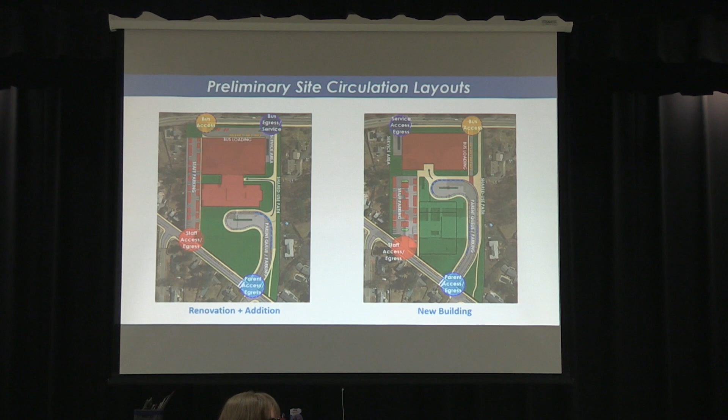Working with you on traffic, but also understanding fields and flow, parking and drop-off, we're establishing criteria and a program for the outside of the building. We have a very specific site here—there's no site like it on Earth. Some people live next door, and you don't live in any other place, as far as I know. So it's really important for us to drive around, walk around, and really understand the site.

The real trick comes in taking that program, understanding there's an existing building here which you've just seen, and then trying to put a new building on the same site so it works better and maximizes the square footage of land available. We've been really focused on trying to help the parking, especially at pickup in the afternoon—people are parking all over the place. We care a lot about the safety of kids crossing walks, and sidewalks blocked off by parked cars. Our traffic engineer had a lot of really good ideas about that, and we're utilizing all of them.

Some of the biggest things we're doing, if you look at the right side, which is kind of a new building, is the idea of getting as many cars off the street for queuing so you don't have backups, and even flexible parking for events, because you can park all around that loop. So we have our parking, but we also have a flexible site. We could come in here and pave the whole site, and you could park everywhere, but that's not good for a little kid to play.

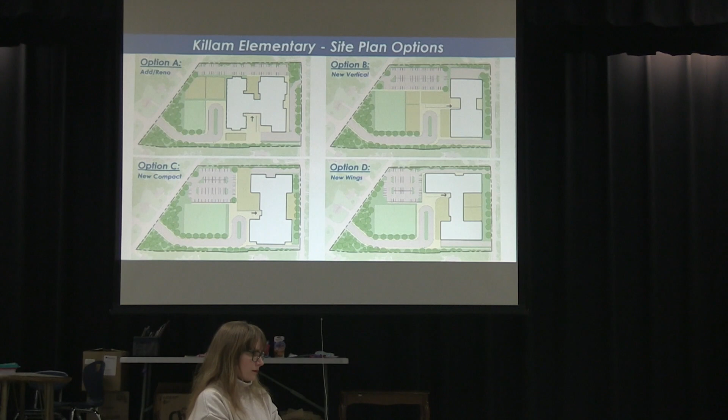It has attributes. And then option D, the idea was, if you could take down pieces of the existing building, say a few classrooms, and there was a way to do that, what would you do differently? Would you re-envision a different kind of layout, a different kind of scheme that might create more opportunity on the site?

So what we're doing tonight is just giving you a glimpse, kind of a heads up. I'm glad there are people here from the select board and people like that, because you're going to see this come back to you over and over and over, more developed. We're just taking the inside and the outside of the building, putting them together. So you've just seen the very first things.

This is the idea of an add-reno. And if you look up here, you see that there's always two. There's one which is A1, full pre-K. That's the larger version. You know that this right here is a one-story, and this is where all the classrooms are. That's the existing wing, but it's one story.

When you have a small site and something is one story, and you have to maybe double the square footage, we can all do the math and realize that there's not going to be much land left. So that's what you see here, a lot of footprint. Even when we build a new building here and it goes 2 or 3 stories high to fit, the length of the queuing is quite short, and we've been trying to get people off the streets. The size of the parking lot along the edge here has a lot of spaces, but actually not as many as we'd like. The play areas are kind of dispersed and limited.

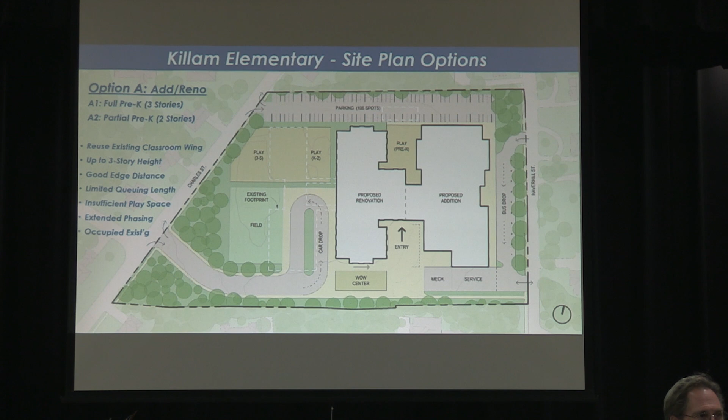For all of these, what we're doing right now is our very preliminary pricing, square footage pricing. We have a really good cost estimator who can look at diagrammatic things and tell us about what it might cost, so that'll be part of your decision-making process. But if anybody asks me tonight how much is it going to cost, I'm going to say I don't know, because I don't—that's the process.

This is so interesting, to challenge yourself to build, say, a 3-story elementary school. I've kind of noticed a thing: when I'm driving around my town and I see the old brick buildings, they're condos now but used to be schools, and they're like 3 stories tall. They used to do it all the time. Then in the 50s and 60s, everything became one story. Maybe they had more land back then, and now there's not as much land.

There is a real trend now to build 2- or 3-story schools again, even elementary schools, for a number of reasons. One, sustainability-wise, it takes up less footprint, and you have more green space, more absorption of water, more natural stuff. It's also better for energy, because a 3-story box versus a spread-out building will have less surface area to lose heat. So it's a good approach, and we should look at it, price it, and understand how it works.

But oftentimes it doesn't work as well for elementary schools when we talk about those adjacencies and the kids going up and down—it's more vertical. It's something for our educators to know about, to tell us if that's the right answer.

And I already mentioned that when we meet again, you will see more 3-dimensional things on the site. We'll even show you preliminary things where you see the height of the building in context with the street. My intuition tells me that a 3-story building too close to the street could be a little overwhelming, and we'd have to either step it or employ other tactics for scale to make it feel welcoming and appropriate.

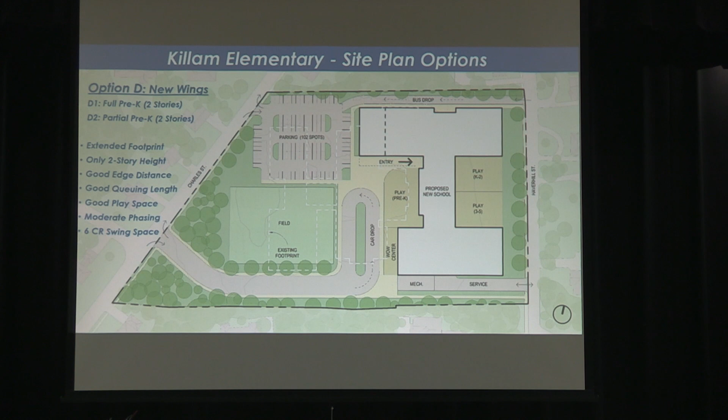Does anybody have any questions? I'm sorry, does anybody else have any questions?

I wonder if you could talk, maybe take one or two options, and talk about how light and sun and heat move. For example, in what you showed, you put the large spaces, the gymnasium, to the more south side of that layout. I see a north arrow. But how does light and heat shape your building design and thinking?

That's from the sustainability guy. So it turns out that 2,000 years ago, they used to build buildings based on the sun. Then somewhere in the last century, everyone forgot about it. Now it's a big deal again, and they're right, buildings should be properly oriented.

I'll start with this one. What we like about this idea is that the wing where all the kids are, imagine all the classrooms, classrooms, classrooms, classrooms, like that, facing south, the sun's coming in like this. The perfect way to do a series of classrooms is to orient them all south and all north. Believe it or not, north light is nice light, it's very consistent. South light you have to kind of control.

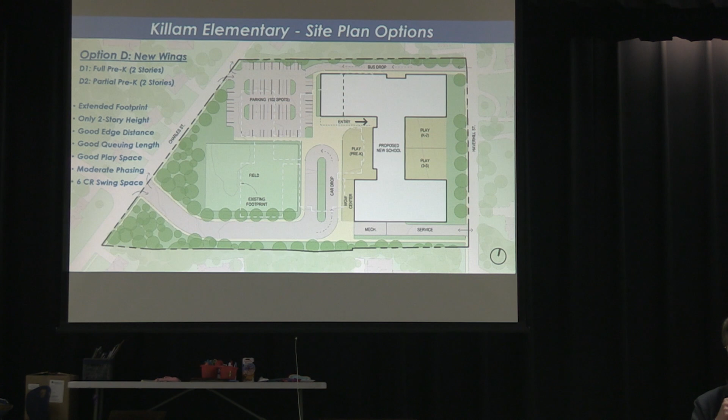And if you can, it's nice to bring light in, to swoop some light down into the middle of a building so it's getting very thick, and share some light evenly. So this building actually orients really, really well. It doesn't have to be on the south side of the site or the north side of it, we could flip this whole thing, but it worked better this way. It's more about privacy also. So these are really well oriented for the sun.

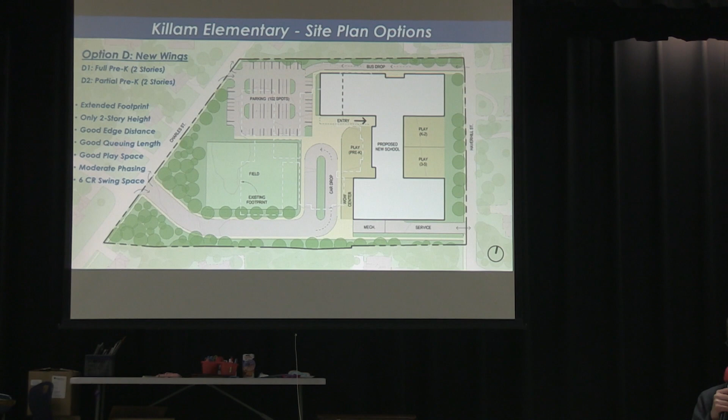In my opinion, west light is the worst kind of light for a classroom. I've learned that from faculty over the years, because in the afternoon it comes strafing in really low. You can't control it. You can pull down the blinds, but it creates glare on the screens, kids can't see anything, and there's heat gain that comes from that. So if you're ever doing a school, try not to put your classrooms on the west side. The east is lighter, it's not as bad.

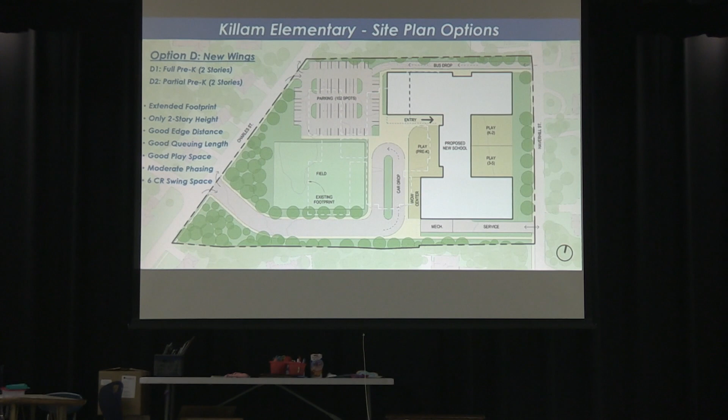These are rules of thumb, and they're really important. For a school like this, because it has different edges, it's not as bad in terms of getting daylight into the middle of the building. You probably don't need a lot of skylights or anything like that. It's really nice.

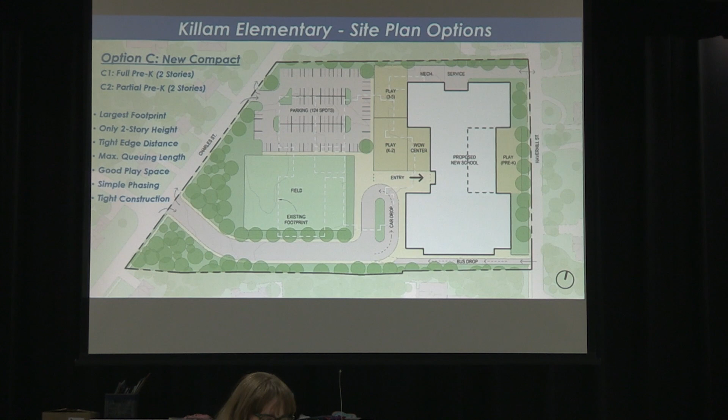If we go back one, you see that this building actually has classrooms wrapping around like this, which isn't bad. I mean, there are some facing west, and I'm not particularly happy about that, but we have to do revisions for it.

These clerestories right here, they blocked this one off because it's probably south-facing. Yeah, that's the south, so they blocked it off, and it still has light coming through. They evened it out, is what they did. This is pretty well daylit during the day when you come in here. There's a lot of natural light. It doesn't feel good not to be able to see outside, but it is well daylit.

So you can see that when you compact it like that, you have to think of it more as a donut, and that's exactly how we would approach it. Daylighting is super important. Why is that important also for heat and electricity? If we can daylight a space, or take a gymnasium and have clerestories around it, during the day you don't have to turn on the lights. You save a whole bunch of electricity, more than you'd think. So daylighting is really important.

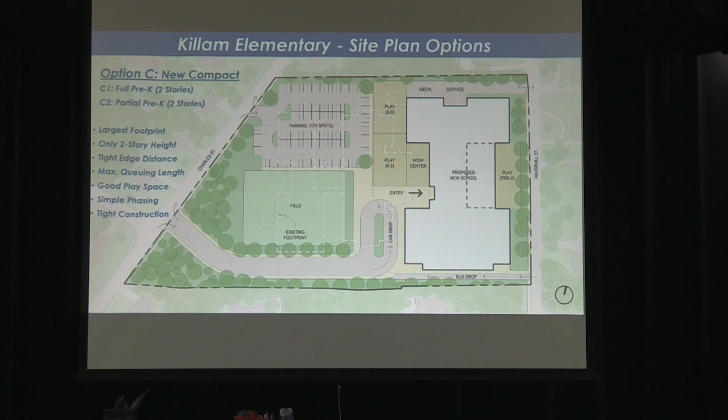And the quality of daylighting is important too, so you can spread the light in the classroom toward the back. Is that the kind of thing you're asking? Yeah, absolutely. Let's hear from our lighting expert next.

I wanted to add to your point about daylighting being important for classrooms. From a climate standpoint, it's important to shield and push the daylight further in. But from a learning environment standpoint, the presence of daylighting for students is so important because studies have shown that the right kind of daylighting and lighting inside learning spaces helps with alertness of children and helps the learning environment. So imagine the opposite end of the spectrum: if it's dingy, you're not excited. But if it's nicely balanced, well lit, without glare and direct sun, that really stimulates students. So I agree with you, I think the alertness side would be tremendous.

That's been your experience too? Yes, absolutely, working on schools as well. Are you a plant? No. I'm a supporter for good environments. I love them.

Anybody have a question? Yes. You're talking about switching the field and parking. My only concern with that would be the people taking deliveries coming in with a big parking lot where the field is. I like where the field is because it separates that rotunda drop-off. You're going to have parking there already, right, so that's just putting that out there.

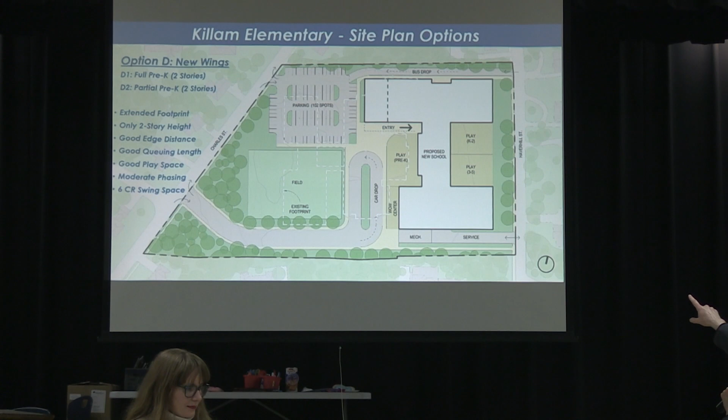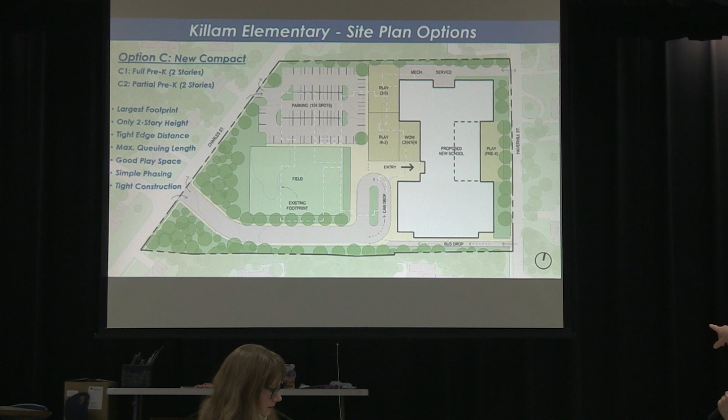But in terms of that, it's very interesting because sometimes you find something you wouldn't expect. This building right here is 2-story, but it's lengthwise and a little closer to the edge. So if we do a study, we might find that even though it's 2 stories, that's one thing. But if you go back, you see that's a 3-story building, but it's much further away from the property line. So you might find interesting things with that, because I can't imagine, you know what I mean. So that's a good one. We will do that.

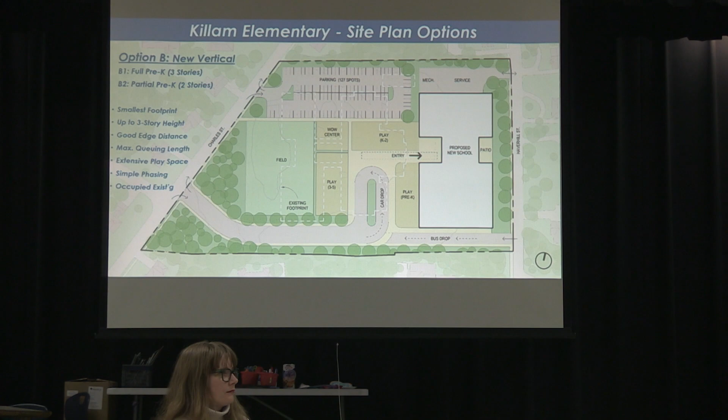We didn't have much more. I hope we didn't disappoint you.

She's not done, I just have a final slide here to talk about our next steps, which I actually started with, so maybe I've already said all these things.

So we're going to be doing preliminary square foot cost estimates starting next week. We're going to continue to develop these schemes, site plans, and building designs. Next time we come see you, we're going to have some of those 3D views we talked about, so we'll show how the building looks in massing, in 3D, and how it looks from the street.

I know everyone's very eager to learn about that. So that'll be July 8th, and we hope you'll make it. We'll all hang around for a few minutes, so if you have questions, or just want to shake our hand, it's welcome. Thank you, have a good night.

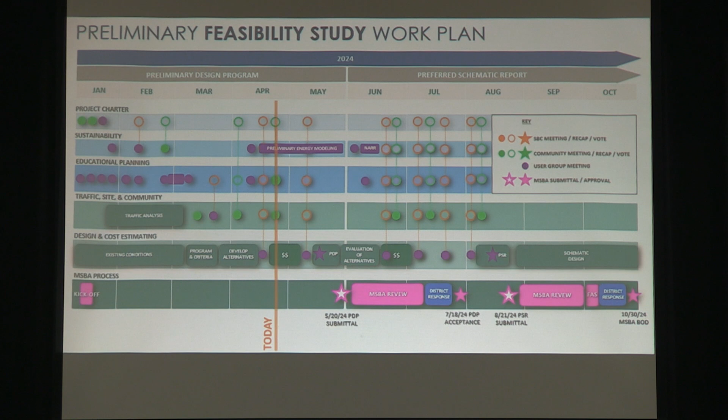So tonight we're going to talk about the educational visioning process we went through with our consultant, MLP, which is My Learning Place, Integrated Design. Then we'll talk about how that educational visioning process has informed the design of the school, the organizational design, how the building is laid out, and the adjacencies of different spaces. And then we're going to show you the 4 schemes, in terms of site planning, that we'll be including for the PDP and in the process, basically where we're at right now with the design at this early stage.

So the educational visioning process probably took 2 months and involved a ton of different people, from staff and the principal at the Killam, the superintendent, and other people from the district level.

We brought in the school resource officer, the rec department, students, teachers, and parents. So all these different people we wanted to hear from, to really understand the Killam school community, the priorities of the community, and the teaching and learning that's happening, the educational process, and then how we can design a school that best meets all of those needs.

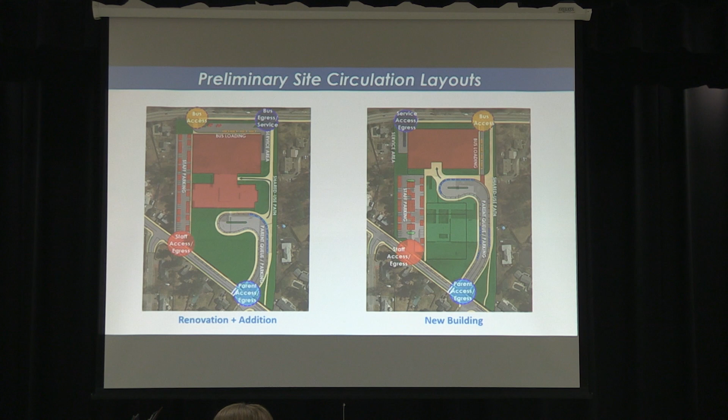We've established a program for the inside of the building and how it should function. Even if it's 2 or even 3 stories, it still has to be able to function. Working with you, with the traffic, but also understanding fields, flow, parking, and drop-off, we're establishing criteria and the program for the outside of the building.

We have a very specific site here. There's no site like it on Earth. Some people live next door, and you don't live in any other place, as far as I know. So it's really important for us to drive around, walk around, and really understand this site.

But the real trick comes in taking that program, understanding that there's an existing building there, which you've just seen, and then trying to put a new building on the same site so it works better, maximizes the amount of square footage of land that you have and all of that.

As you know, we've been really, really focused on trying to help the parking, especially at pickup in the afternoon. People are parking all over the place. We care a lot about safety of the kids crossing walks and sidewalks that are blocked off by parked cars. Our traffic engineer had a lot of really good ideas about that, and we're utilizing all of that.

Some of the biggest things we're doing, if you look at the right side, which is kind of a new building, is the idea of getting as many cars off the street for queuing so you don't have backups and all of that. And then even have flexible parking for events, because you can park all around that loop.

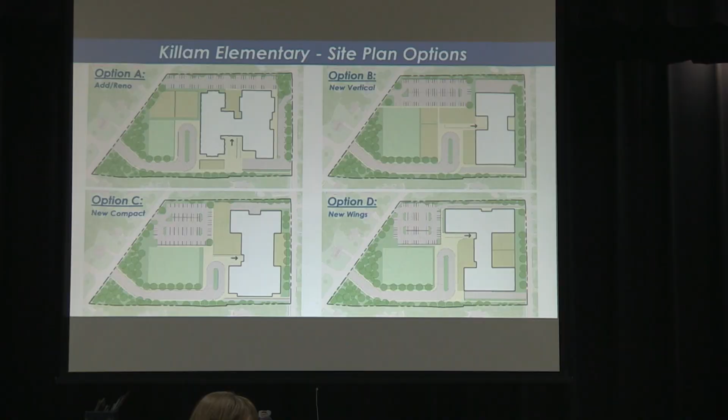So if we're going to leave that open while we build a new building, which is the least expensive way to do this, there's disruption, but it's also the least expensive unless you have some free swing space that anybody has. Maybe you open up all your homes. But...

Building a 3-story building has pros and cons, and we're going to look at that. And we're looking at the building layout for that as well. I will say one of the cons is when I drive down the street on Haverhill, I don't see any 3-story buildings, do you? So that's a thing to think about. That's called scale, and that has to do with fit. Does it fit the neighborhood and all of that? It's very important to us, and then it's important to the people who live there as well.

And then we were challenged to look at creating for option C, a full 2-story school, not 3-story, that held all of the programmed square footage gross of that larger version on the site without tearing down any of this building while we build it. And this scheme right here, you can see how it jogs a little bit because that's the shape of the existing building.

Actually, it's a 2-story building, and we've done layouts and things like that of it, and it actually works. It has attributes. And then D, the idea was, if you could take down pieces of the existing building, say a few classrooms, and there was a way to do that, what would you do differently? Would you re-envision a different kind of layout, a different kind of scheme that might create more opportunity on the site? Next.